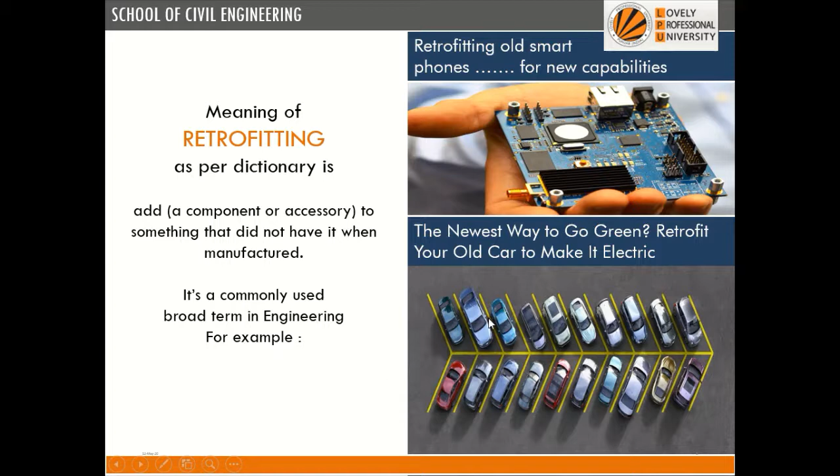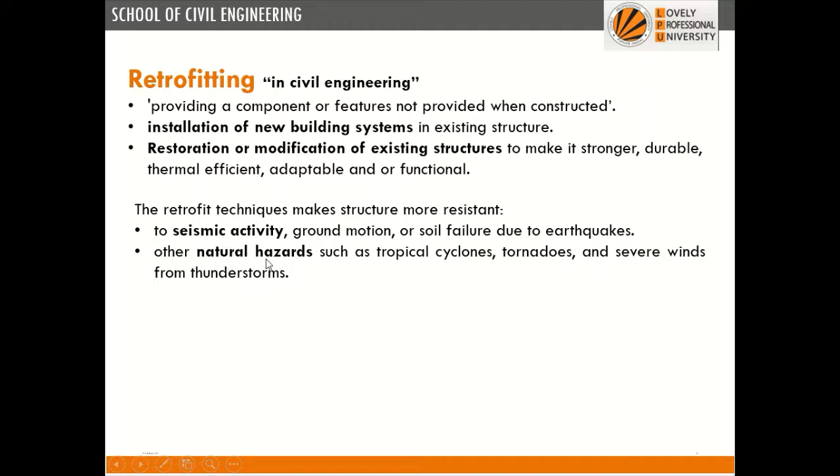Retrofitting in civil engineering primarily means providing a component or feature which was not provided when constructed, or in other words, installation of new building systems in the structure. A restoration or modification of existing structure makes this structure strong, durable, thermal efficient, adaptable and functional. Retrofitting techniques make the structure more resistant against seismic activity and natural hazards like cyclones, tornadoes, winds, or thunderstorms.

Retrofitting also makes buildings sustainable, helps cut carbon emissions, makes it cheaper and easier to run a building, and overcomes poor ventilation or dampness problems, therefore improving the health of occupants. Thus, retrofitting helps in improving the hygiene of the structure as well.

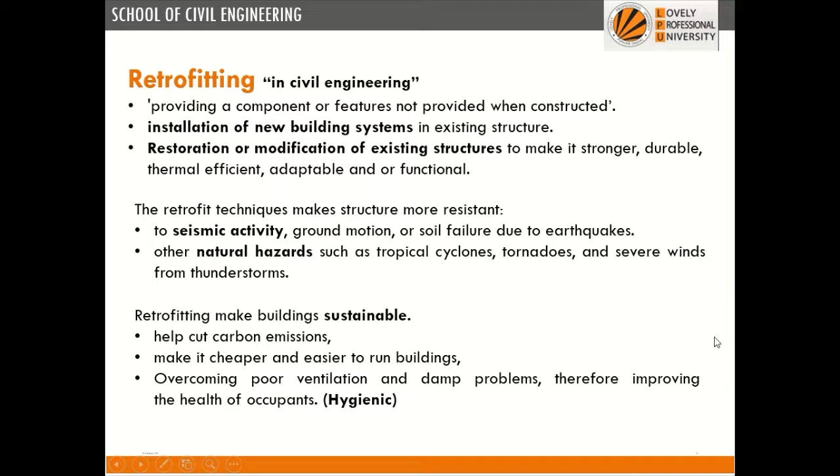Now, we'll use a metaphor to understand this. Suppose I have an expensive jacket which I thought of wearing for at least 3 years. After 2 years, I found that it is maybe tight, or its zip is not functional, or in some places the stitching has torn off. So, should I buy a new jacket or try to fix this? Yes, engineers are basically problem solvers. We should try to fix the problems.

Similarly, in case of buildings, if any problem is there, we should try to solve the problem, because a new building is not an economical or sustainable solution, because it takes a lot of raw materials and energy to build a new structure. We want to maximize the energy saving and extract solutions from the existing infrastructure only.

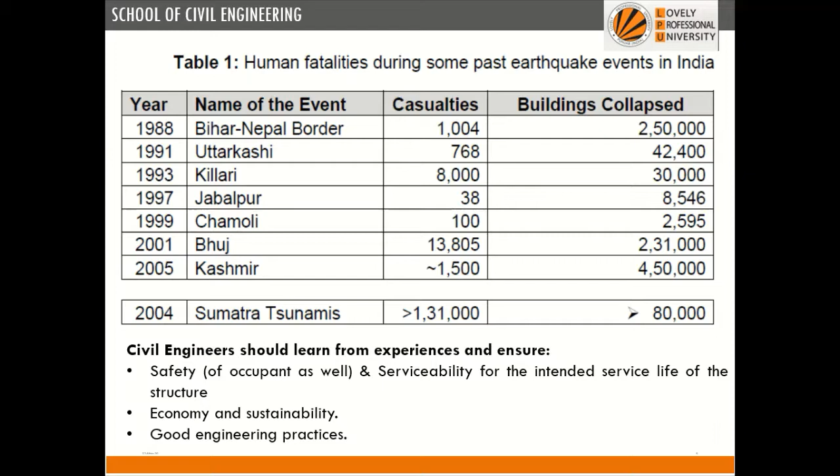This is a table which shows the various earthquakes that have taken place in the last 30-35 years in India. We can see that a lot of buildings have collapsed due to the earthquakes, which has led to the loss of human lives. This is actually a shame on civil engineers. Civil engineers should ensure from their experiences that safety and serviceability of the structure as well as occupants is ensured. Civil engineers should provide good engineering practices which are economical as well as sustainable.

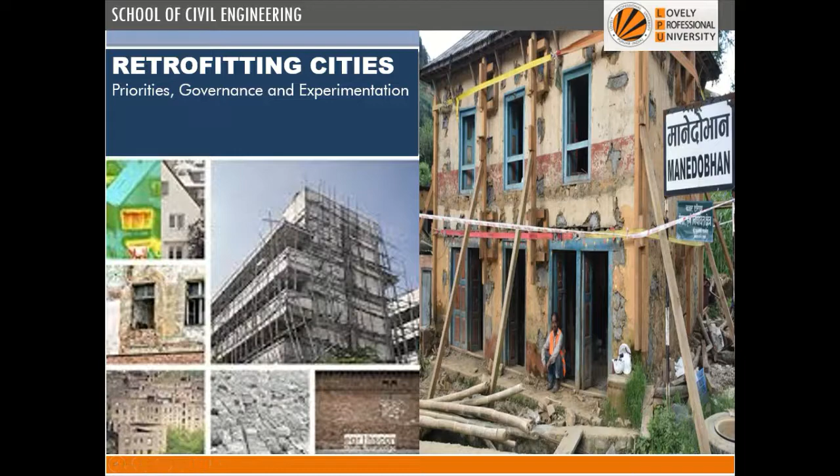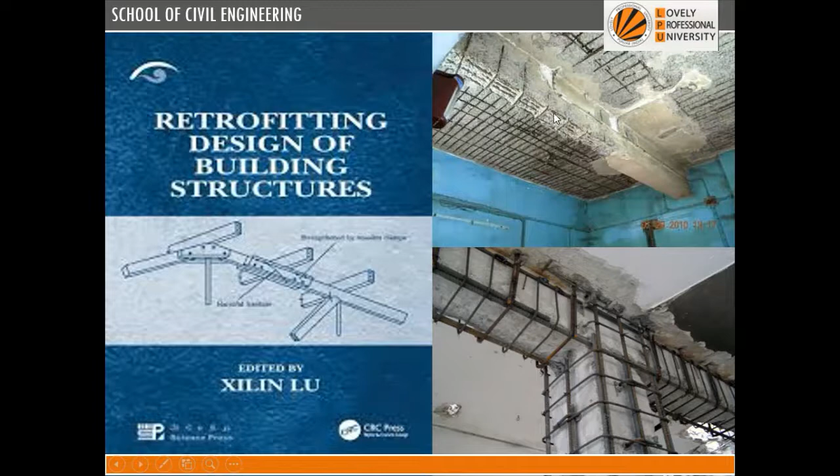A recent earthquake in Nepal has led to retrofitting of the entire city because all the schools and civil infrastructure were damaged very badly. Retrofitting of building components includes beam, column, slab, foundation. Retrofitting is not only limited to old buildings, but it is applicable for commercial buildings. Like if you want to increase the capacity of the beams and columns, or if excessive vibration is there, we can retrofit the building.

Take the example of the jacket we saw earlier. Now suppose this is your first team jersey and you won a medal for your country in this jacket. So in no way you're gonna throw this jacket, right? You will try to restore and preserve it forever. Similarly, civil engineers should also ensure conservation and restoration of all heritage structures as well. So retrofitting of heritage structures is also an area in retrofitting.

Retrofitting also helps in improving the energy efficiency of the structure. We as designers or engineers look for energy efficient lighting design using both natural as well as artificial lighting systems. We want to utilize the solar energy or solar heat gain, or in some cases we tend to avoid it. We want to utilize the rainwater, natural light, air circulation and ventilation by providing proper position and openings of standard size across the building.

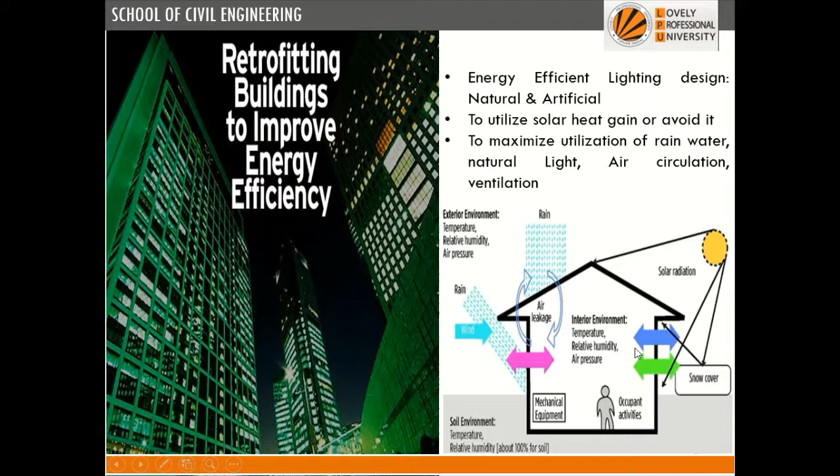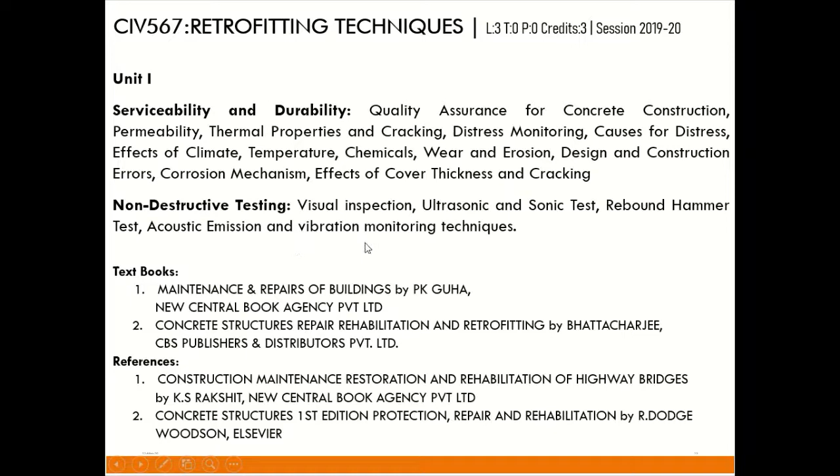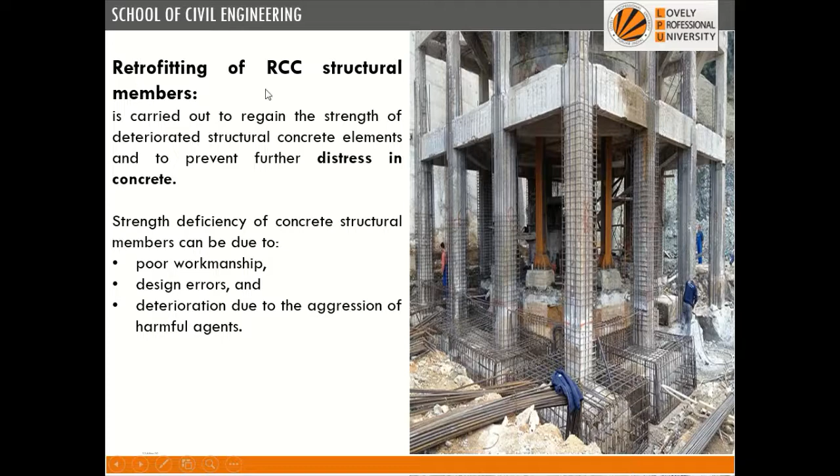Retrofitting of RCC structural members is generally to regain the strength of deteriorated structural concrete elements, and it prevents further distress in concrete. The strength deficiency of structural concrete is mainly due to poor workmanship, errors in design, and deterioration due to aggression of harmful agents. When we deal with RCC structures, we primarily deal with concrete also.

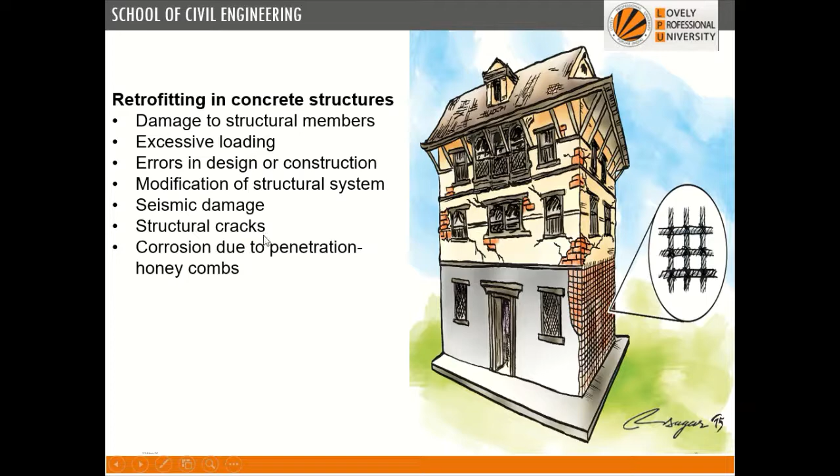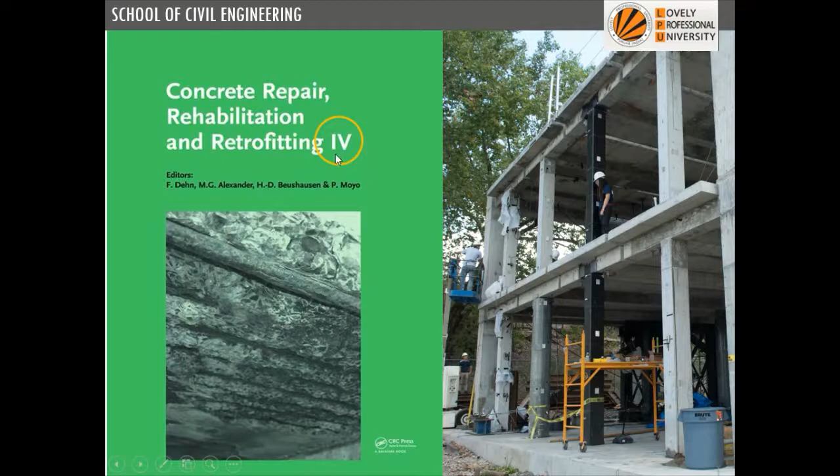Retrofitting of concrete structures damaged due to excessive loading, errors in design, modification in structural system, maybe seismic damage or structural cracks, corrosion due to penetration through honeycombs. Repair, rehabilitation and retrofitting of concrete structures is an old topic. As you can see, already 4 parts of this book are out.

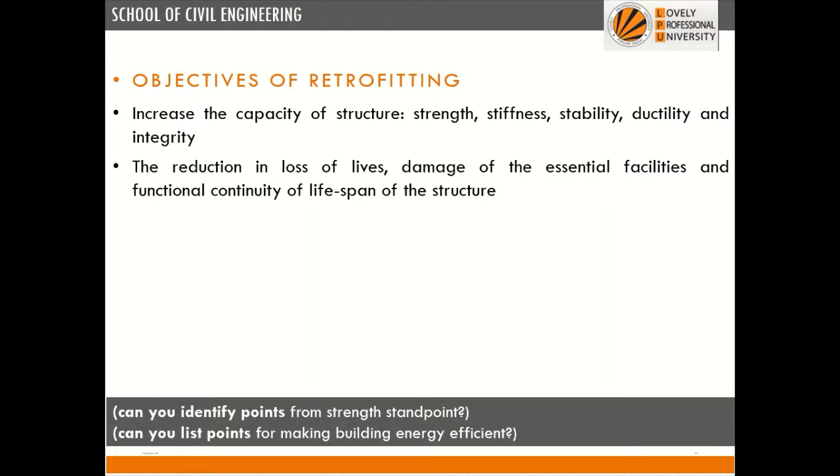To summarize, the objectives of retrofitting are basically to increase the strength, stiffness, stability, ductility and integrity of the structure; reduce loss of life; maintain essential facilities and functional continuity over the lifespan of the structure; increase the lateral stiffness with high shear concentration near walls; increase the overturning moment capacity at foundation; and increase the strength in all possible directions by jacketing, by providing reinforcement, or by increasing the wall areas or the number of walls and columns and ensuring the proper connection of all the joints.

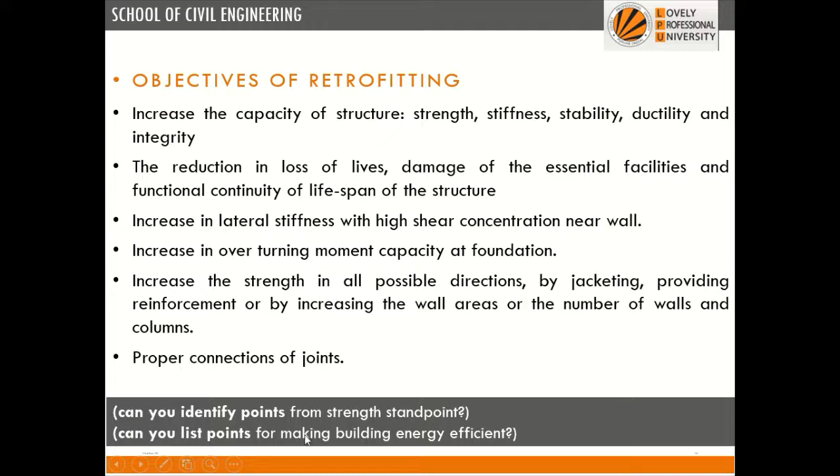Here is food for thought. Can you identify some of the points from a strength point of view, and can you list points for making buildings more energy efficient? So welcome to the world of retrofitting civil engineering structures.